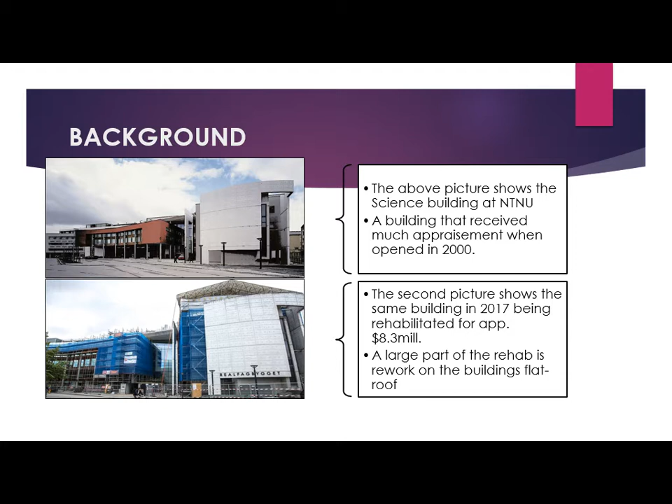The above picture shows the science building at the Norwegian University of Science and Technology, a building that received much praise when opened in 2000. The second picture shows the same building in 2017 being rehabilitated for approximately $8.3 million. A large part of the rehab is rework on the building's flat roof. The rehab takes time and negatively affects the users of the buildings, as well as putting unnecessary strains on the maintenance budget of the owner.

So, the picture shows a roof with what seems to be an inadequate draining solution for rainwater. The topic of errors and need for rehab on flat roofs was featured in a Norwegian trade journal. On this basis, an interdisciplinary research project between researchers specializing in building physics and project management was initiated.

Nordic climate is rough. Rain, wind, snow, especially in the coastal areas, provide a demanding setting for construction. The roof is usually the most exposed facade of the building, and thus constructing flat roofs may be more vulnerable to roofing defects than traditional pitched roofs. A recent study showed that roof defects made up 22% of all defects in buildings investigated by SINTEF Building and Infrastructure, a research organization from Norway. A delivery process aimed at creating value for a customer may be pulverized on a micro level by unsatisfactory procurement services, sloppy handling, and substandard materials.

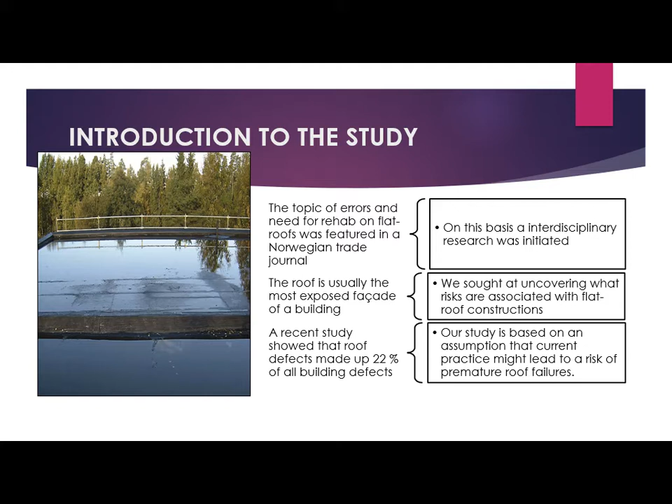So, the purpose. A lean construction process depends on reliable procuring and proper workmanship. The research presented is based on our assumption that current practice during construction may lead to an increased risk of using subpar materials or sloppy craftsmanship. Governing these challenges is not a trivial task and a cornerstone of a viable lean construction process. The premise of this study was to explore what the main threats to the value of the client in the case of flat roof constructions are. Furthermore, to explore how the clients govern in order to oversee that the requirements regarding construction materials and assembling are met.

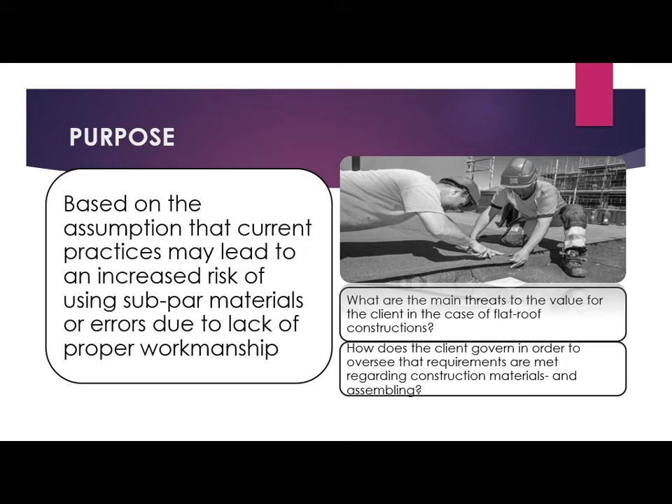The methodology. The overall research project addresses the intersection between project management and building physics. A case study approach with the use of interviews as the main source of data was chosen. The data collection took place between November 2017 and February 2018. Actors from different parts of the supply chain were interviewed, focusing on the client perspective.

These consisted of representatives from clients, suppliers, as well as one representative from a major insurance company and one representative from the Norwegian Directorate for Building Quality. The study is limited to the case of flat roof constructions. The context of the study was seemingly growing concern in industry-specific newsprints regarding errors related to flat roofs.

One specific article written by a supplier aimed at the clients caught our attention. We therefore emphasize the client, with the purpose of increasing our insight into how clients consider such a particular and critical part of a project.

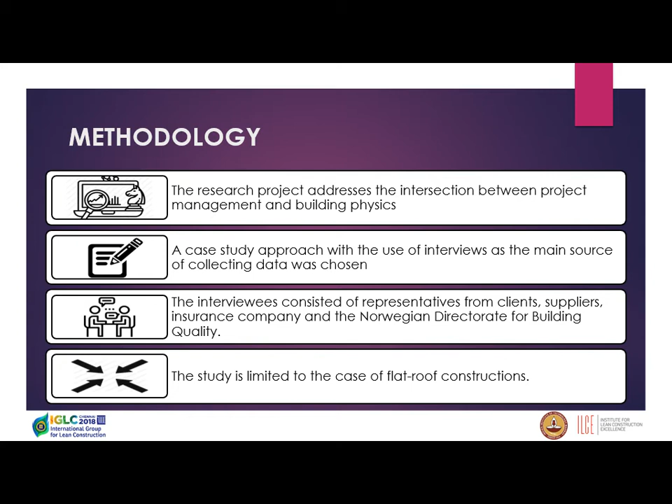So what are the main threats to flat roof construction? First of all, it's inadequate perforations. It was perceived to be the most troublesome and vulnerable area. It was stressed by several of the interviewees that perforations and connections between structures were the most troublesome part of a roof. The second was inadequate craftsmanship.

Few problems related to the roofing materials itself were reported, but some interviews note that extreme climatic conditions might cause failure with roofing solutions that have been proven trustworthy elsewhere. The third one is substandard materials. For instance, the choice of fastening system is crucial in areas with excessive wind loads, and extra layers of membranes are crucial in areas such as corners or traffic zones.

The fourth one is insufficient climatic adaptation. Failure to recognize and compensate for climatic conditions or use conditions may lead to premature defects on otherwise well-built roofs. The fifth one was user failure. The lack of communication between the client, the user, and the contractor. Several of the interviews mentioned user failure as a potential threat to roof integrity, such as insufficient snow removal or lack of replacement of aging membranes.

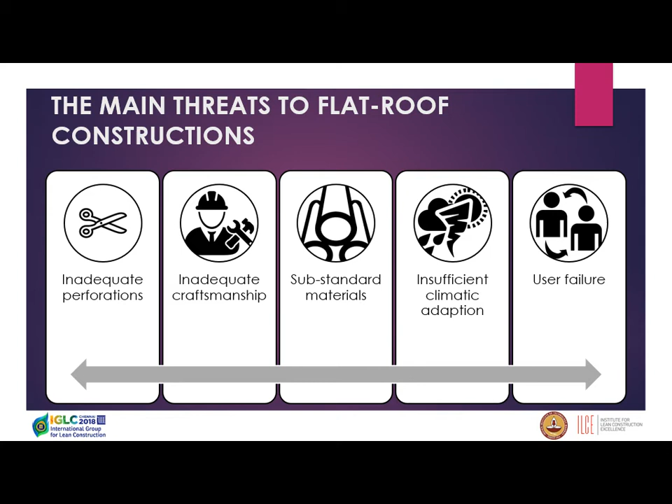So, implications for clients. First of all, flat roof constructions are typically carried out by specialist contractors. However, clients interviewed seem to be reluctant in their involvement with specialist contractors. Often, clients have little knowledge or influence over subcontractors used in the project. When the client chooses a delivery method, they tend to choose the method that shifts and minimizes the risk and the number of contractual relationships, thus, to a large part, avoiding concerns with subcontractors and the materials chosen.

The second one is the industry favors a conventional safeguarding approach. It's borderline with the first one, focusing on shifting the risk through traditional project delivery methods such as design-build or design-bid-build. Also, the interviews emphasized the importance of having favorable construction insurance, which is also a traditional safeguarding approach, in order to mitigate the unwanted risk of unserious actors and dubious workmanship. Several problems might occur using such delivery methods. This could result in insufficient control over material choices.

Moreover, such aspects of building projects are critical for the lasting value of the building. By creating a setting where every actor is focusing on shifting the risk, disputes will eventually involve multiple actors in the supply chain. And involving multiple actors will result in unnecessary cost within the supply chain and disputes before, at, or after handover. If not properly followed up, fraudulent behavior may occur. That's the last one. No, it's not the last one.

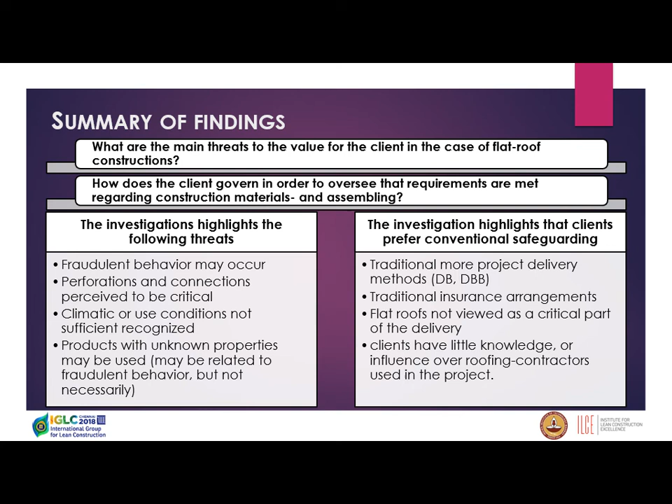Conclusion. A delivery process that aimed at creating value for the customer may be pulverized on a micro level by unsatisfactory procurement services, sloppy handling, and fraudulent or substandard building materials. Short-term perspective, the divergence of stakeholders' interest and premature roof failure present a great threat to the value creation. And poor procuring and handling threatens the construction process.

The main threats to the value for the client in the case of flat roof constructions are design flaws and construction errors, and those are more common than material faults itself. Perforation and transitions of the roofing material stand out as the most risky element of a roof. And as stated previously, the client governed through the use of conventional safeguarding approaches. In the context of such complicated constructions as flat roofs, both the client and the responsible contractor need to be aware of the possible risk described above.

There seems to be an outlook that emerging forms of project delivery, such as integrated project delivery, that emphasize lean principles, such as focus on people, relations, and integration, may prove to be more effective than traditional project delivery approaches.

Practical implication. In a lean perspective, the message is rather clear. Buildings are increasingly complex. Flat roofs are increasingly complex, especially considering rough climate and the increase in perforations due to ventilation, among other things, through the roofs. Premature roof failure presents a great threat to the value and should be viewed as a critical part of the project delivery. Clients could benefit from implementing lean governance and principles, emphasizing social mechanisms and promoting valued relationships in the project.

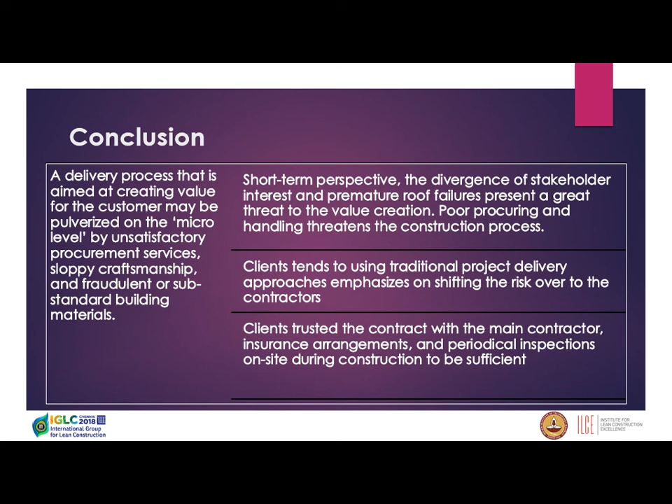Sorry for that. That was the last slide.

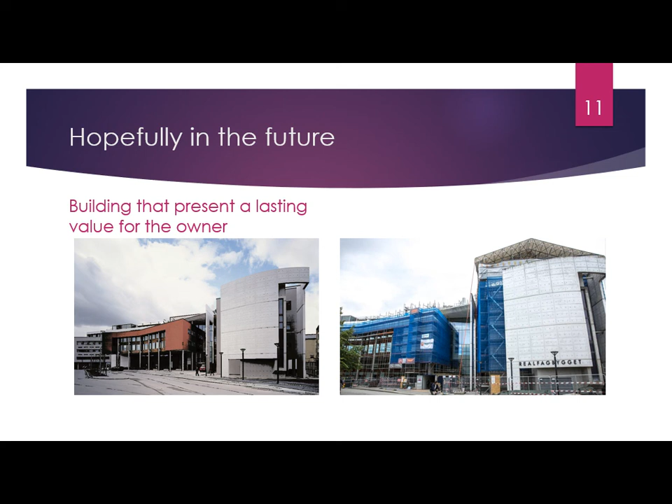And hopefully in the future, we will provide buildings that present a lasting value for the owner and without critical errors leading to earlier than planned rehab.